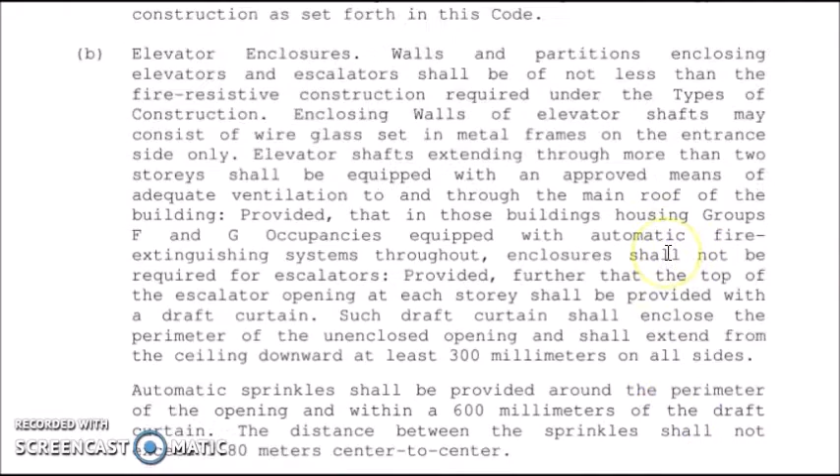Our previous discussion was about enclosure of vertical openings, so we need to continue here with other vertical openings. All shafts, ducts, chutes, and other vertical openings not covered in paragraph B shall have enclosing walls conforming to the requirements specified under the type of construction of the building in which they are located.

In other than Group A occupancies, rubbish and linen chutes shall terminate in rooms separated from the remainder of the building by a 1-hour fire-resistive occupancy separation. Openings into the chutes shall not be located in required exit corridors or stairways.

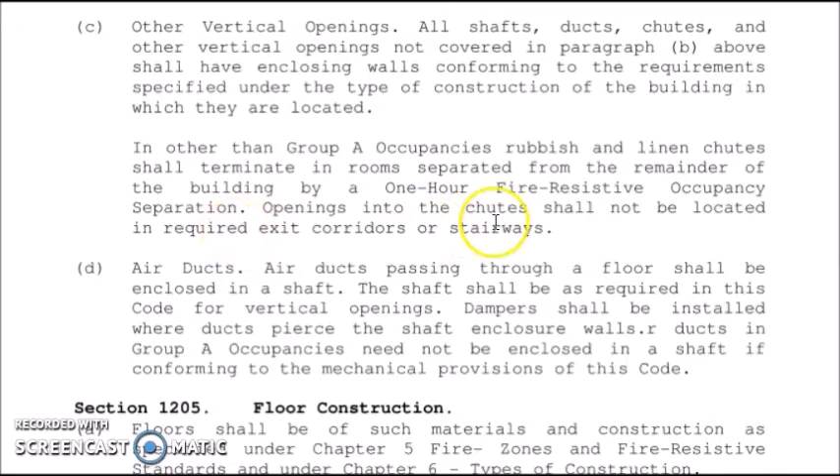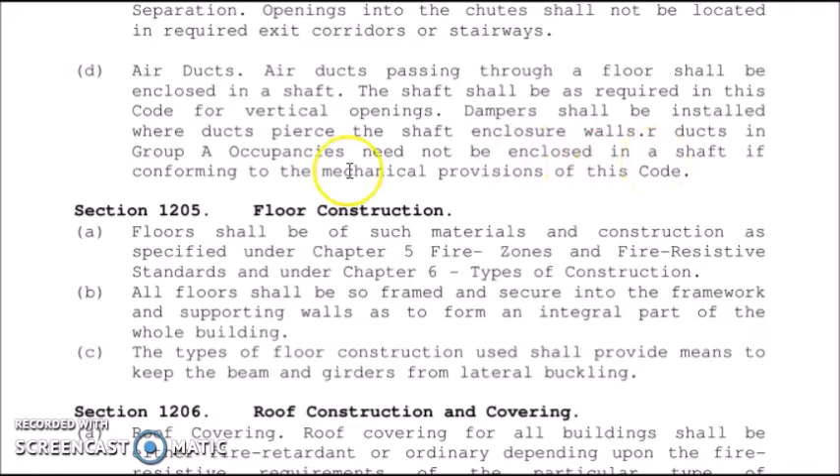Now, let us proceed to section 1205, floor construction. First, floors shall be of such materials and construction as specified under Chapter 5, Fire Zones and Fire Resistive Standards, and under Chapter 6, Types of Construction.

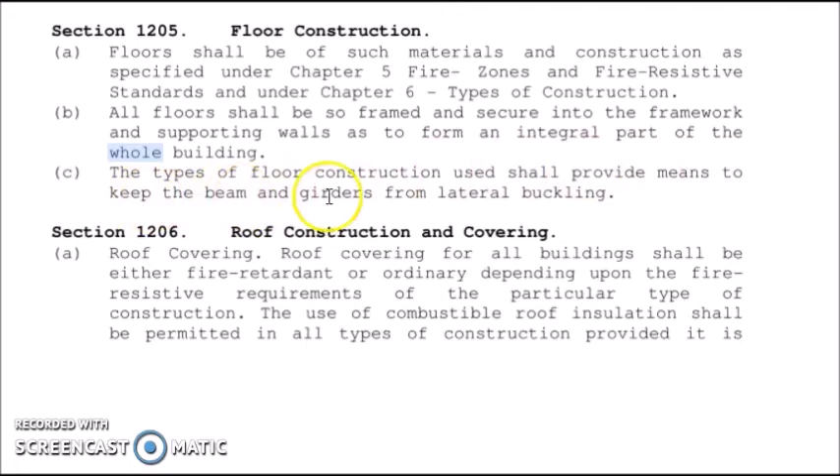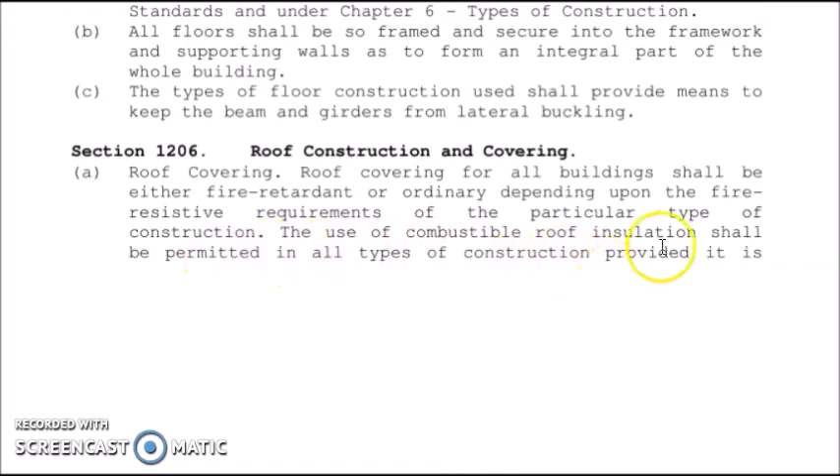Then, let us now proceed to section 1206, roof construction and covering. Roof covering for all buildings shall be either fire retardant or ordinary depending upon the fire resistive requirements of the particular type of construction. The use of combustible roof insulation shall be permitted in all types of construction provided it is covered with approved roof covering applied directly thereto.

Then, roof trusses. All roofs shall be so framed and tied into the framework and supporting walls so as to form an integral part of the whole building. Roof trusses shall have all the joints well fitted and shall have all tension members well tightened before any load is placed in the truss.

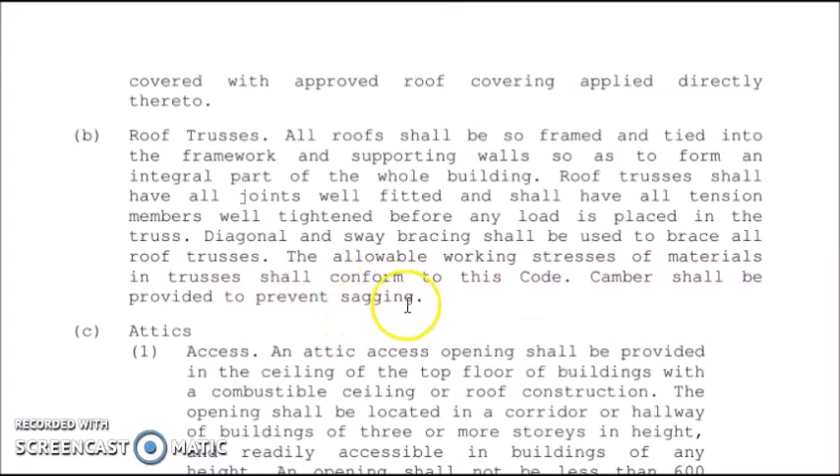Diagonal and sway bracing shall be used to brace all roof trusses. The allowable working stresses of materials in trusses shall conform to this code. Camber shall be provided to prevent sagging. So, to give you an idea what a camber in trusses is, here it is.

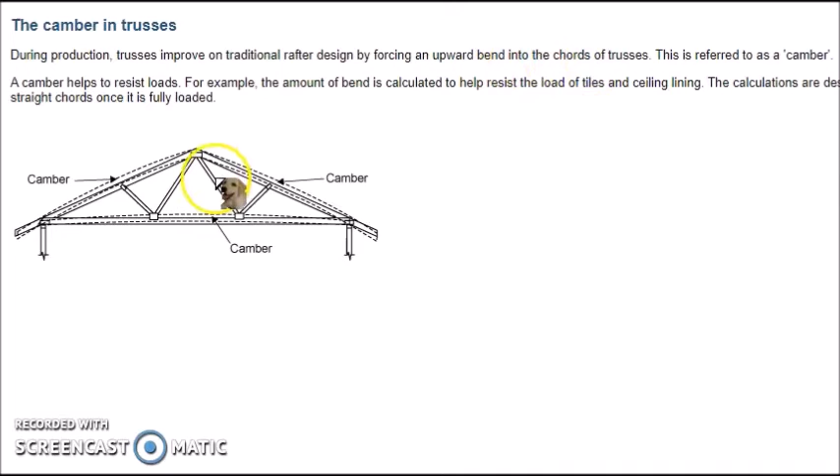During production, trusses improved on traditional rafter design by forcing an upward bend into the chords of the truss, and this is referred to as camber. So basically, a camber helps to resist loads. For example, the amount of bend is calculated to help resist loads of tiles and ceiling lining.

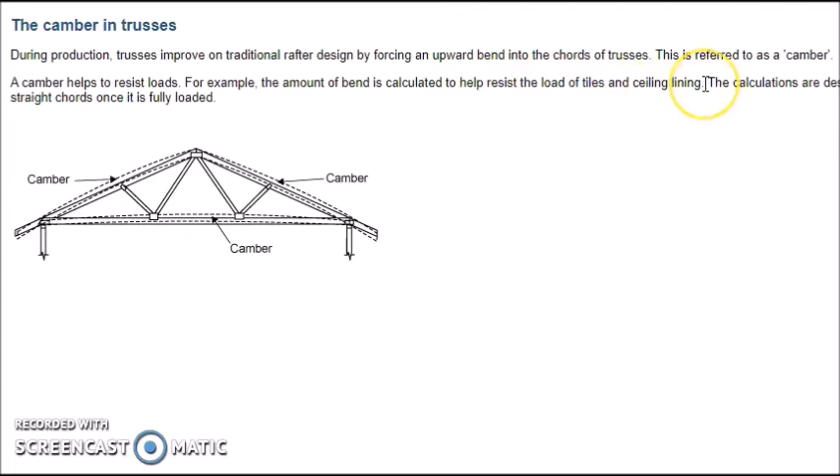Now we'll proceed to attics. Access: an attic opening shall be provided in the ceiling of the top floor of buildings with a combustible ceiling or roof construction. The opening shall be located in a corridor or hallway of buildings of 3 or more stories in height and readily accessible in buildings of any height.

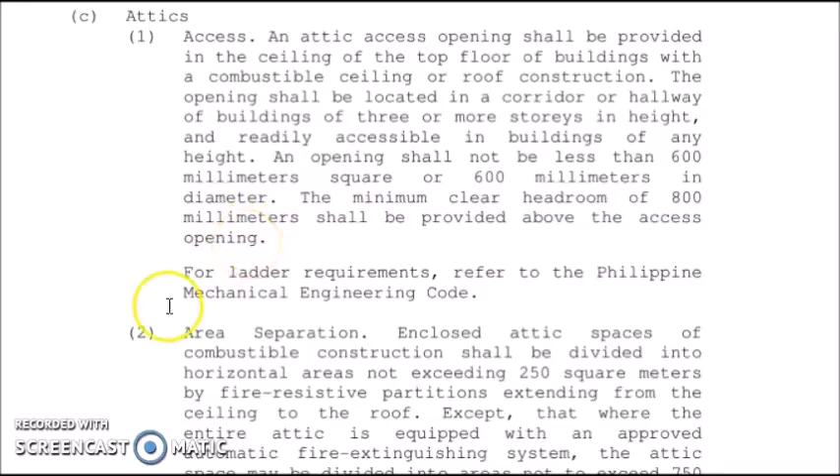So I guess some of you are fascinated to have your bedroom in an attic. So it's also nice.

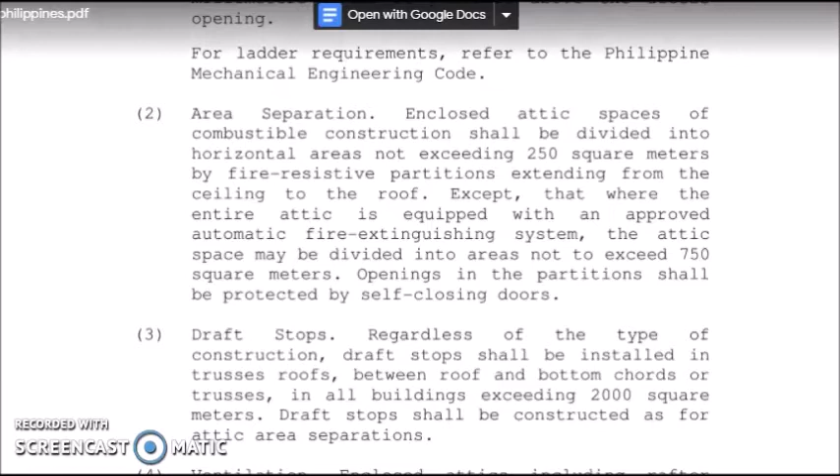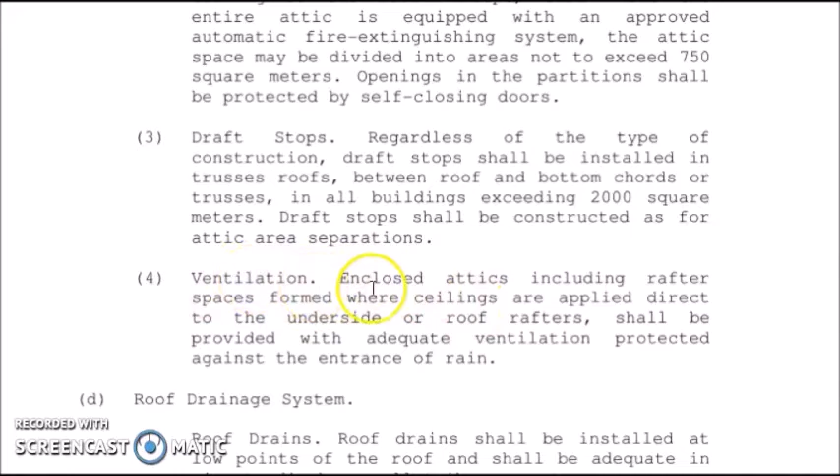All the requirements for an attic, from area separation to draft stops and ventilation, you can check and read under section 1206, letter C, attics.

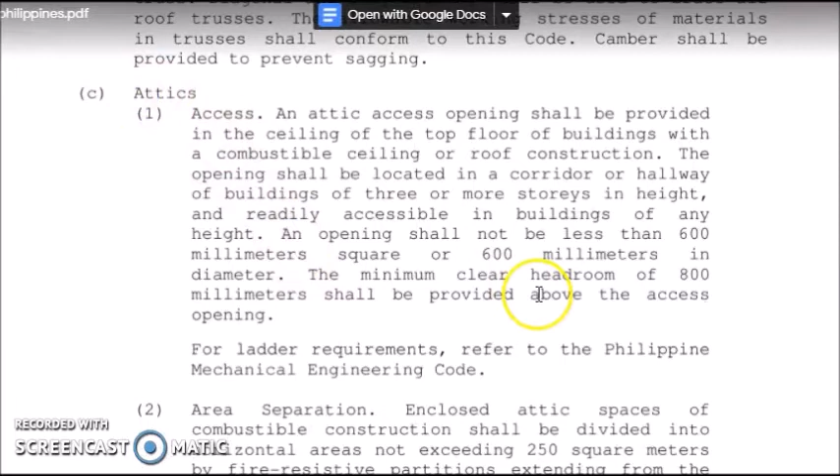Next, we need to tackle the roof drainage system. Roof drains shall be installed at low points of the roof and shall be adequate in size to discharge all tributary waters. Overflow drains and scuppers: where roof drains are required, adequate overflow drains shall be provided.

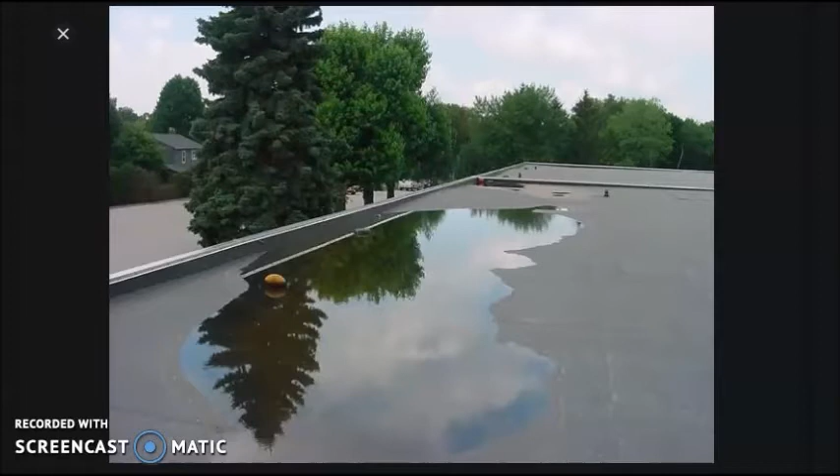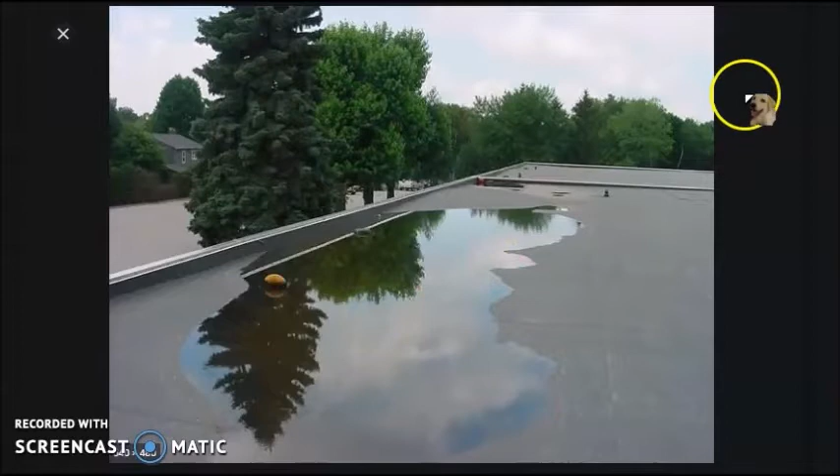So like this, especially if you are designing a building with a roof deck, you should design your roof drain well, at a lower point of the roof deck, so that the water won't be stuck like this, and it will really flow down the drain. The same thing as this one. To avoid your roof deck appearing like this, with water stuck,

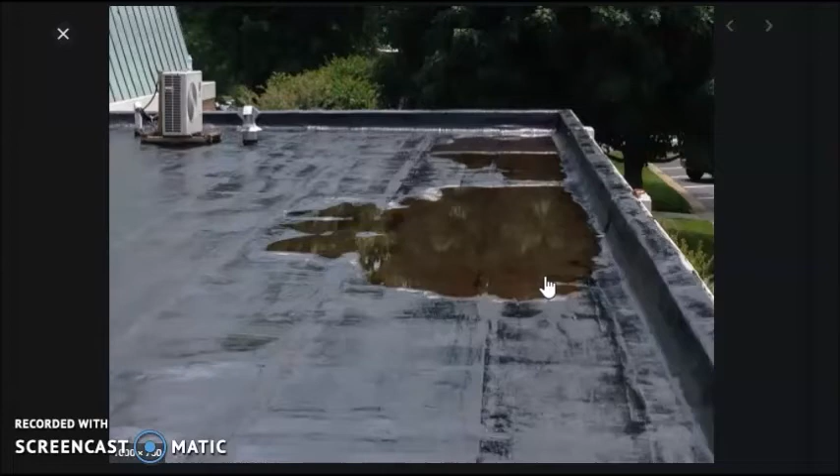you need to be careful and instruct your mason well to do it properly and have your drain on the lower level, with a certain inclination down across the elevation of the entire slab.

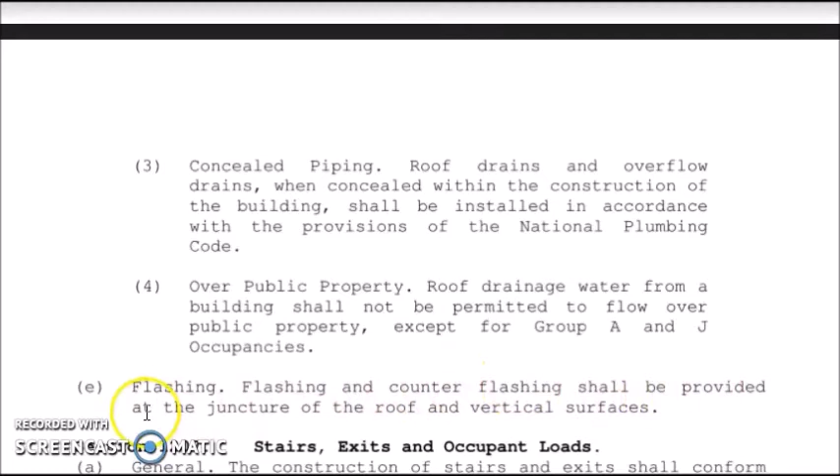Then, continuing from that, the concealed piping over public property will be discussed, including flashing. Flashing and counter flashing shall be provided at the juncture of the roof and vertical surfaces. To give you an idea, this is what the flashing will look like. This is the flashing, compared to the other side which has no flashing, so you can actually distinguish if the roof has flashing or not.

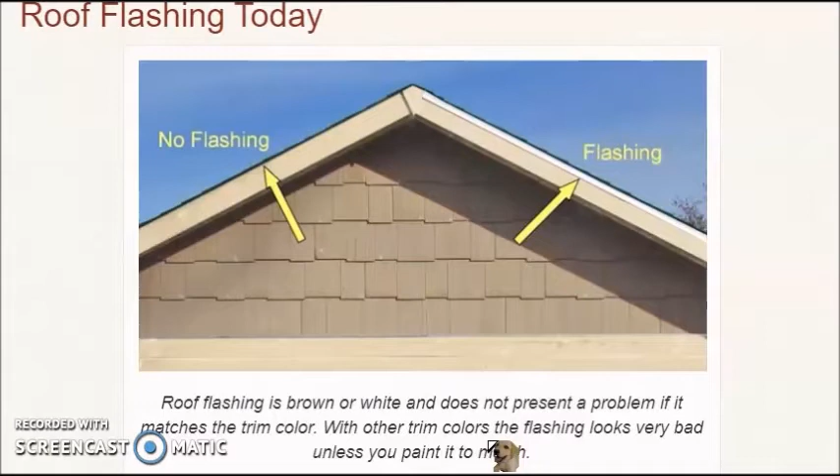Roof flashing is brown or white and does not present a problem if it matches the trim color. With other trim colors, the flashing looks very bad unless you paint it to match. Actually, the color doesn't matter, because sometimes it depends on the material that you're going to use for flashing.

Now, let us proceed to Section 1207, the stairs, exits, and occupant loads. The construction of stairs and exits shall conform to the occupant load requirements of buildings, reviewing stands, bleachers, and grandstands. First, determination of occupant loads. The occupant load permitted in any building or portion thereof shall be determined by dividing the floor area assigned to that use by the unit area allowed per occupant as determined by the Secretary. So this is how you are going to determine the occupant loads. It's like

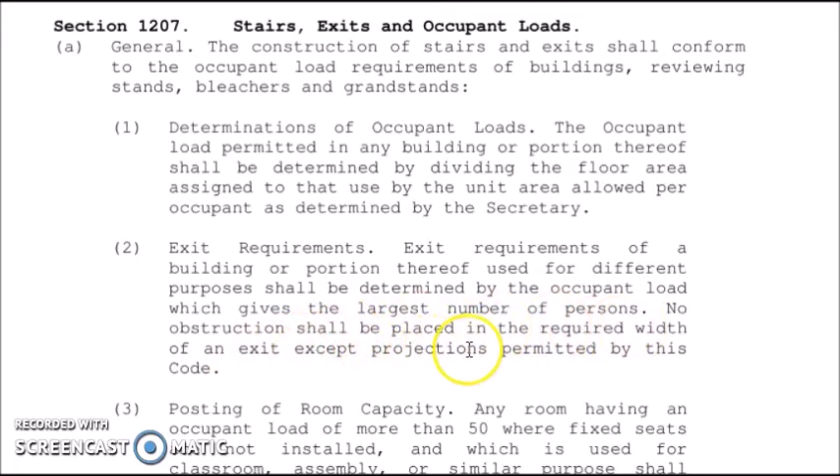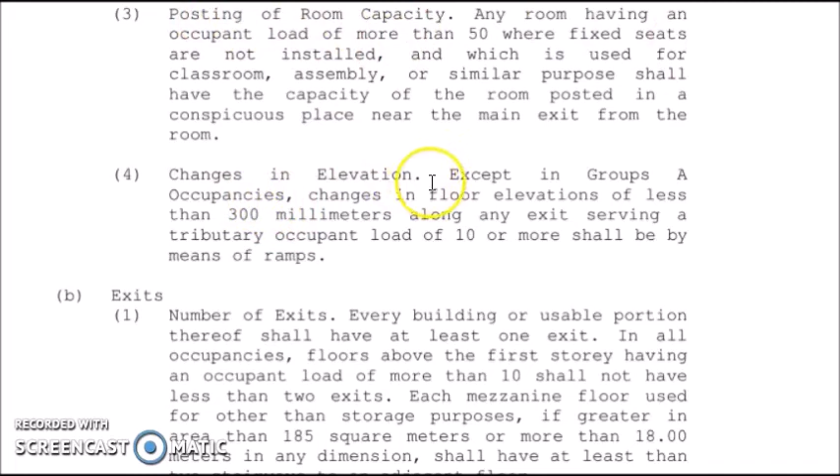having a formula here. Exit requirements of a building or portion thereof used for different purposes shall be determined by the occupant load which gives the largest number of persons. No obstruction shall be placed in the required width of an exit except projections permitted by this code. And then the rest will follow in terms of the posting of room capacity and changes in elevation.

As for the exits, every building or usable portion thereof shall have at least one exit. This is a very important thing that you are going to consider, that in every building you are really required to put at least one exit. A building will not pass the engineering department when you get the building permit if you don't have at least one exit. In all occupancies, floors above the first story having an occupant load of more than 10 shall not have less than 2 exits. So you need to remember this.

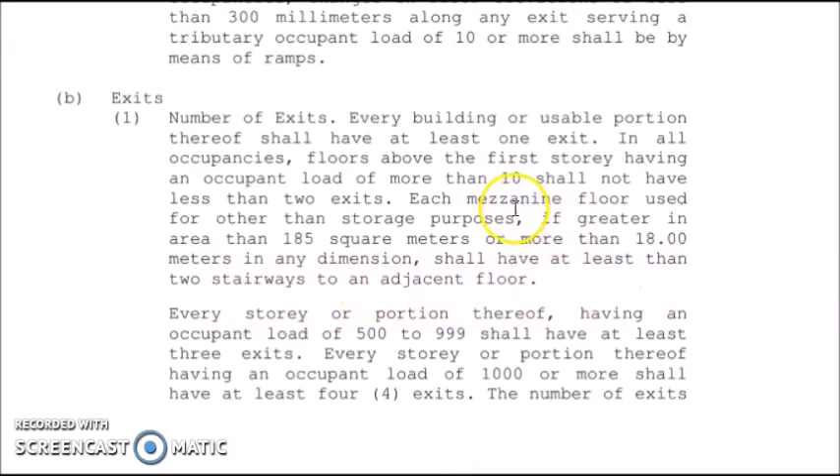Each mezzanine floor used for other than storage purposes, if greater in area than 185 square meters or more than 18 meters in any dimension, shall have at least 2 stairways to an adjacent floor. So what is a mezzanine floor? This is how a mezzanine floor would look inside a structure or inside a space, inside a unit of a building. There is another structure that is put up.

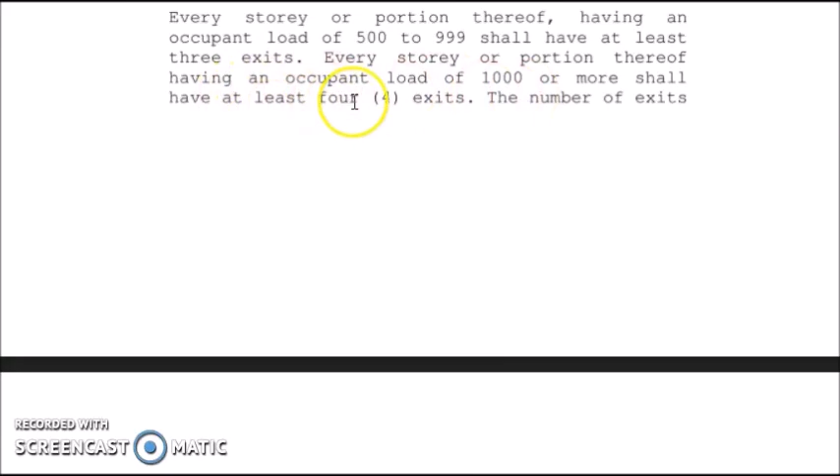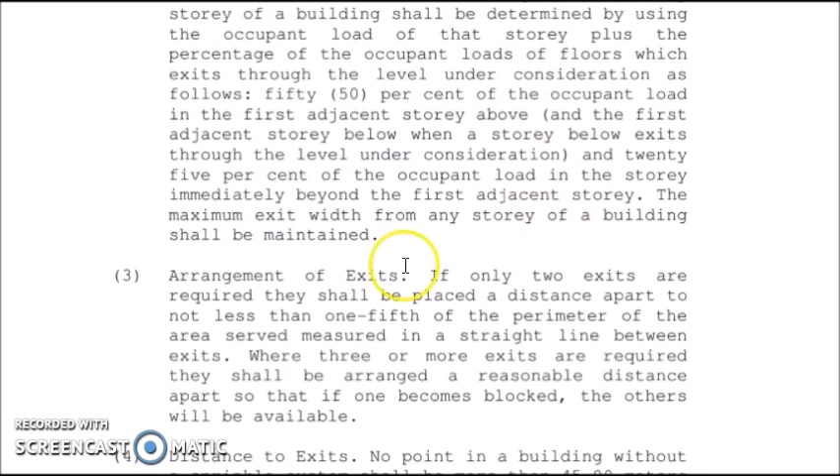Every story or portion thereof having an occupant load of 500 to 999 shall have at least 3 exits. Every story or portion thereof having an occupant load of 1000 or more shall have at least 4 exits. And everything will follow, including the width of the exits, the arrangement of the exits, the distance to exits, and then the doors. The provisions herein shall apply to every exit door serving an area having an occupant load of more than 10 or serving hazardous rooms or areas.

So door swing. Exit doors shall swing in the direction of exit travel when serving any hazardous areas or serving an occupant load of 50 or more. So if this is an exit door, the swing should be going outward, not going inside. Not to the outer space, I'm sorry. So going out.